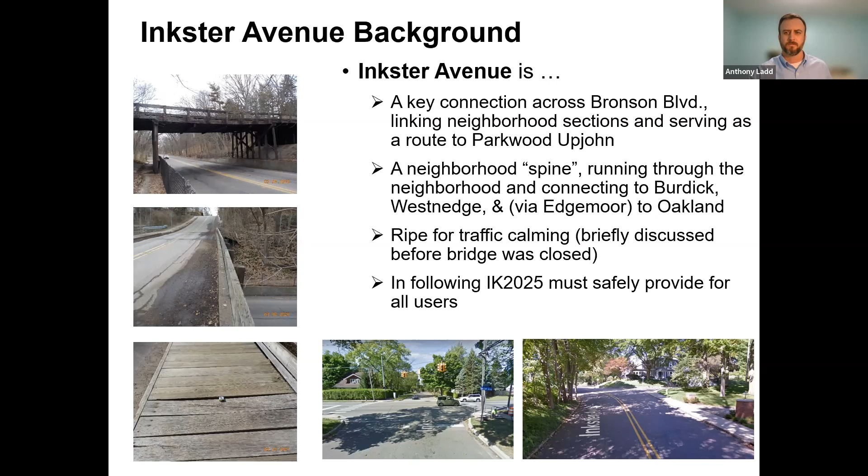The existing Inkster Bridge was built in 1990. It is an entirely timber span bridge with timber substructure, 42 feet long with a 6-foot wide sidewalk that was originally designed. It still exists, however, as many of you know, it is in rough condition.

In the spring of 2021, we made the decision, along with consultation with OHM, who handles a lot of our bridge inspections and our bridge program that we work with closely, to monitor conditions of all of our bridges, make sure our routine inspections are done, our specialty inspections are done on time and reported to MDOT accurately.

There were several concerns in spring of 2021 that prompted the city to close the bridge for vehicle traffic, mainly with loading concerns. And what we mean by that are trucks that do not necessarily adhere to the weight limits that are posted. The way that works is our consultant will come and do an inspection.

There is an engineer that gives a safe load rating for those vehicles, and we were not seeing complete compliance even after having discussions with heavy vehicle companies that you might normally see, such as recycling and trash collection companies, other heavy construction pieces of machinery, such as dump trucks and heavy loaded equipment that was not adhering to the posted weight limit.

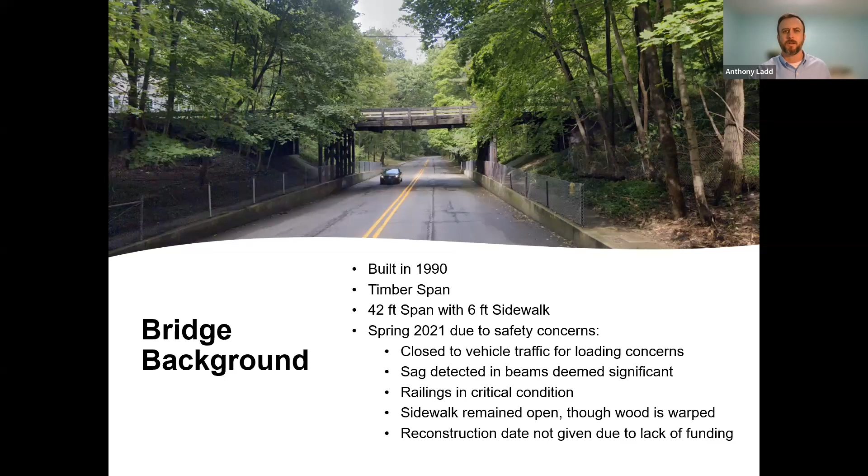These are more pictures of the existing bridge. You can see the deck condition started to deteriorate as well, and once that layer becomes permeable and water starts to infiltrate, with freeze thaw and other forces working on those timber members, that's what spurred the sag and the separation, the bending of the rail.

So those were the physical challenges that this bridge posed. And once that was decided to be closed, we are now facing funding challenges.

One of the things that we need to remember about this bridge in particular is that it is open to vehicular traffic and it is a designated Act 51 certified street. What that means is it's eligible for your gas tax dollars that come from the state. If the city decided to discontinue vehicular traffic on this bridge, we would not be eligible for that funding. And as it sits today, that's currently the funding mechanism for getting this bridge replaced and open back up for all members of the traveling public.

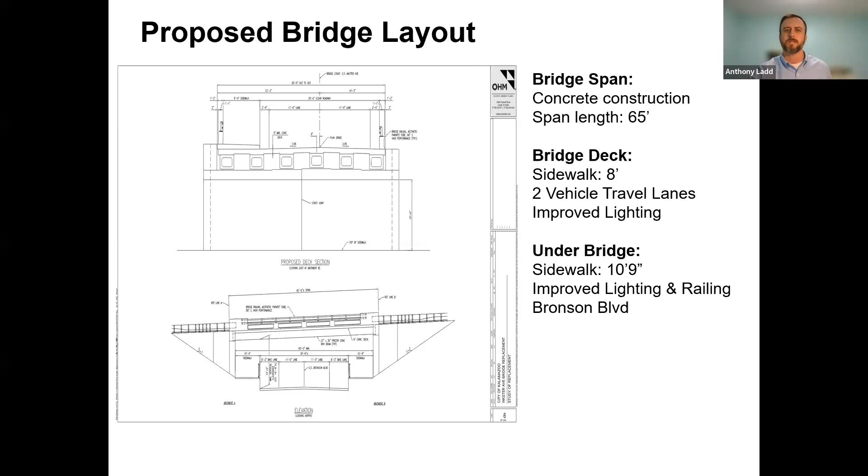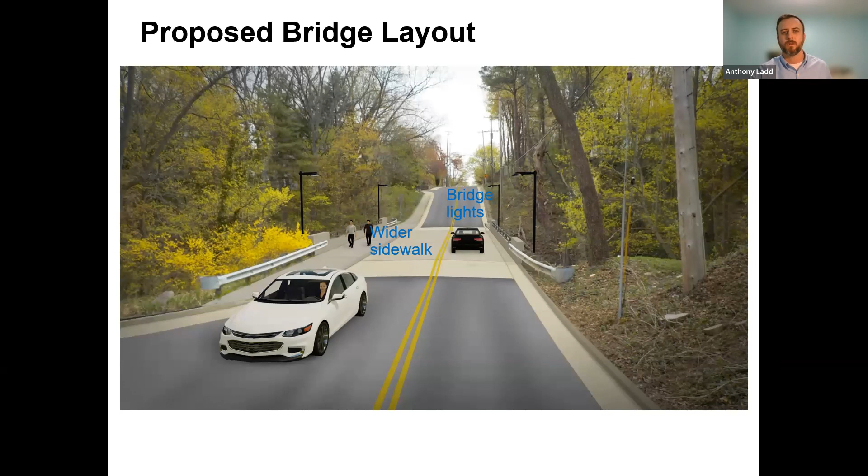The next slide would be a view from the deck if you were headed east on Bronson Boulevard or on Inkster. You can see it's very similar to the layout that was there before, with the addition of bridge lights, new railing, new guardrail, and a much wider sidewalk for pedestrians.

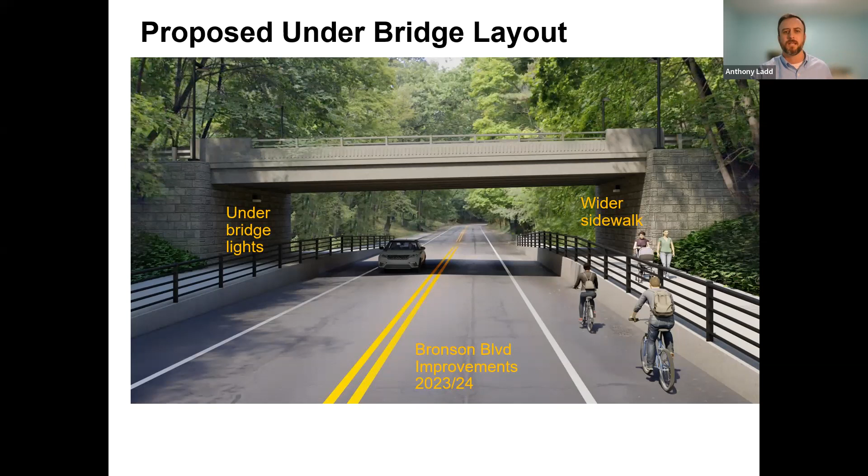This is a view from the side. Again, a couple of things I want to point out is the very wide sidewalk—it might be a little difficult in the rendering to picture, but it is significantly wider than what exists now. There's also the addition of railing that will replace the existing chain link, concrete decorative features on top of the bridge rail itself, different stamped features we'll talk about in a minute, and lights underneath the bridge as well.

This is pointing out the railings. These are the three items we are really looking for input from the community to weigh in on: we have several bridge wall designs you'll see on the sides of the bridge, which we call the bridge abutment, as well as railing along Bronson Boulevard and the pattern along the bridge railing on top.

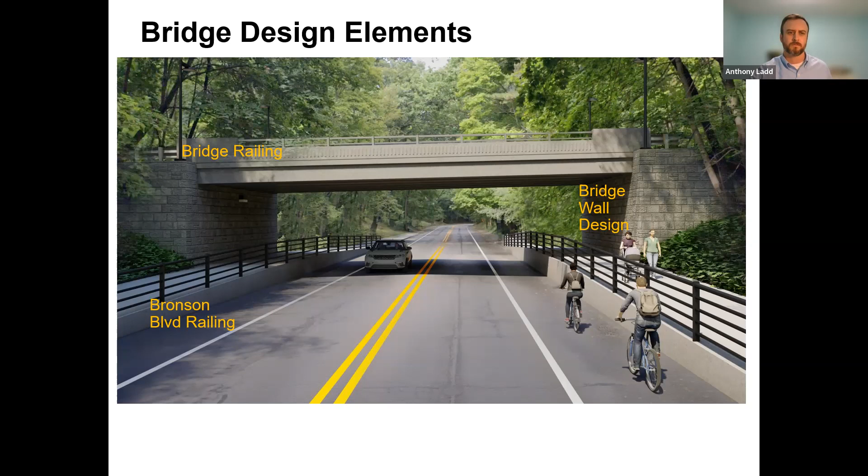So I'm just going to kind of speed through these. These will be some things that will be posted online and that we are looking to get opinion on.

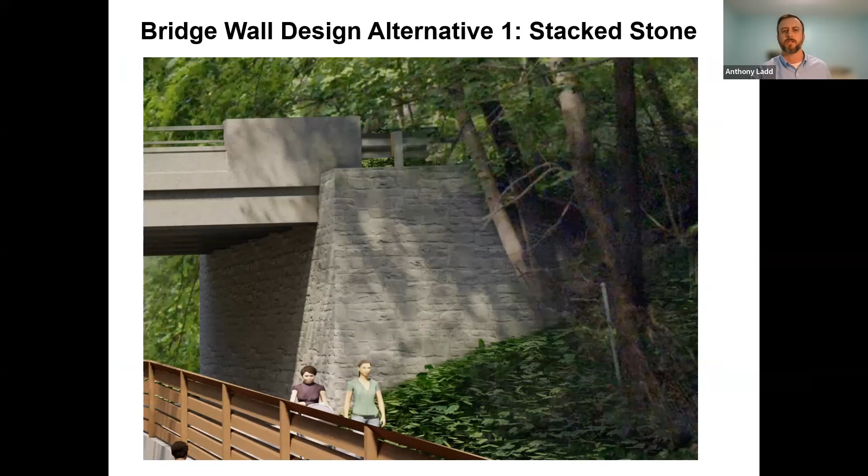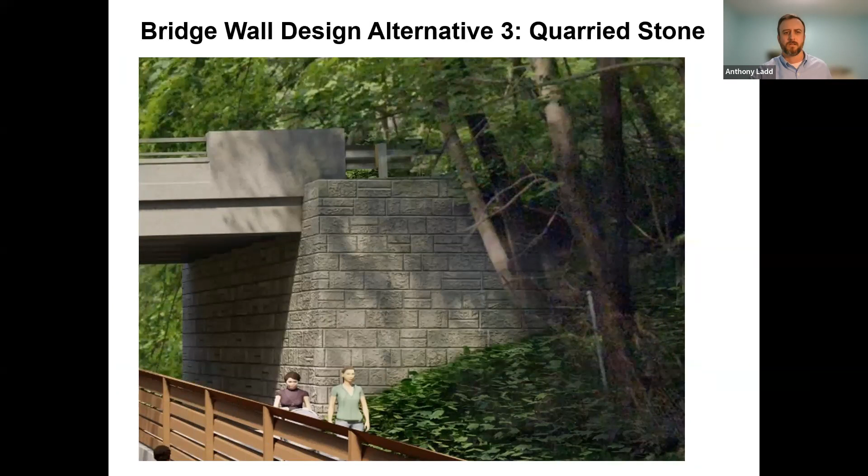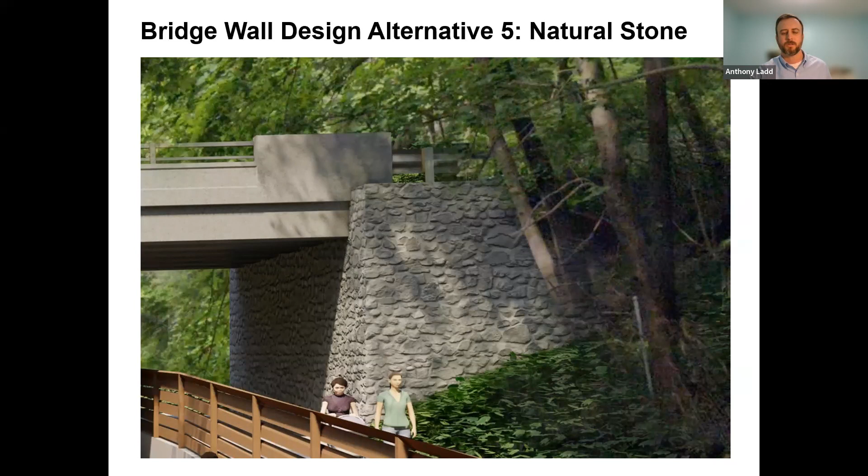These alternatives here are focused on the bridge abutments themselves. This is stacked stone, this is a block pattern, quarried stone, sandstone, and natural stone. Some of these stamped patterns resemble some of the retaining walls that can be seen along Bronson Boulevard too, so I'd like to point that out as that's being considered.

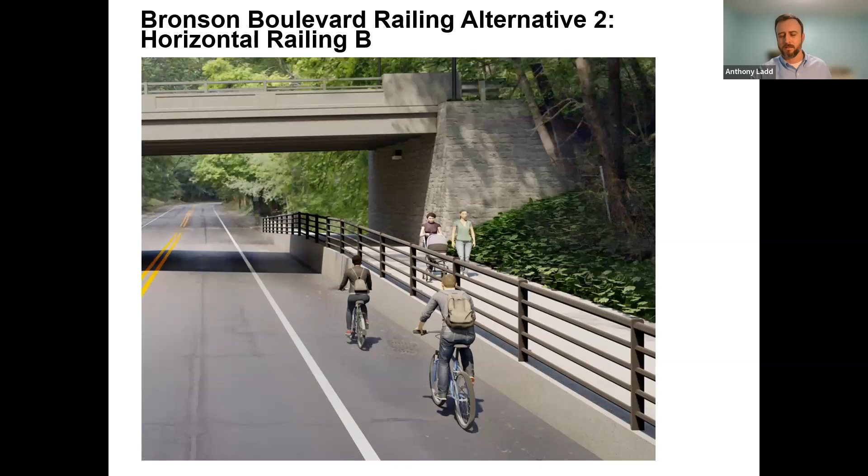The alternatives that we're looking for opinion on along Bronson Boulevard: this is one type of the horizontal railings, this is the second horizontal railing, and the third choice is a vertical picket that we have to choose from.

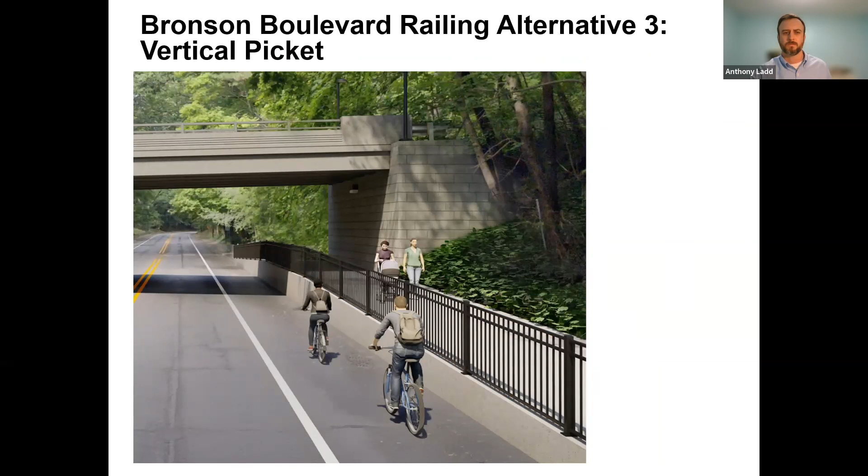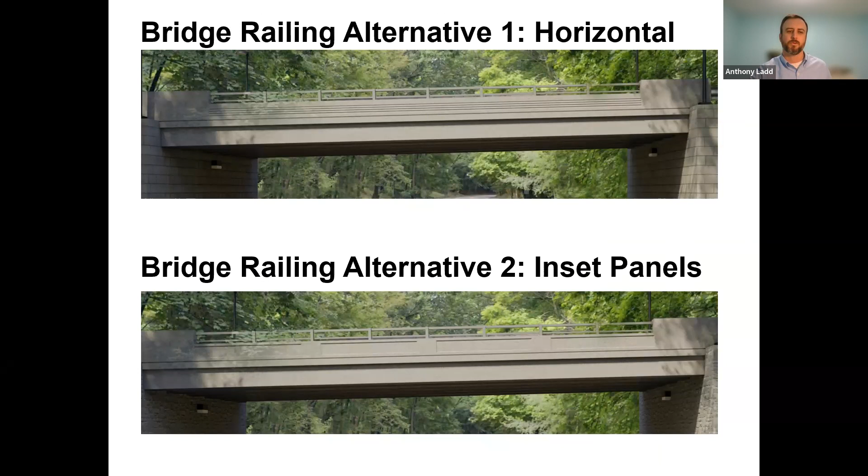And this is, again, probably a subtle difference, probably something that you'll have to look at online to really zoom in and see, to weigh in on. But these are decorative bridge railings to choose from.

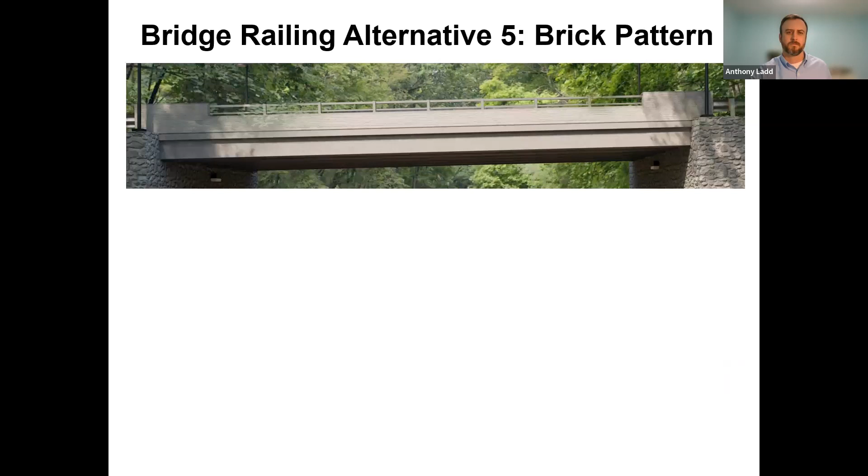Before we talk about next steps, I do want to speak more broadly again to how this Inkster Bridge affects the neighborhood, because we did hear a lot of concern about fast cars. We did hear a lot about being able to travel safely off of the road, where a lot of this neighborhood does not have existing sidewalk.

And that is something that we're working hard to address through a lot of our programs and relationships that we're building with neighborhoods through the neighborhood planning process. I think Christina might say a little more about that too. I don't want to overstep my area there, but these are programs that we're working on to address these issues, that we believe this bridge can be a part of, to help get drivers where they need to go, and get non-motorist users, whether they're school children or adults, or just anybody recreationally using non-motorized facilities. This is something we've been dedicated to for at least the last 18 months.

And then we've really ramped that up in the last year. We're equally excited to talk about our plans for those pilots and trying to understand specifically where the problems are in the neighborhood, and addressing those issues, not specifically to one bridge location, but looking to treat that issue holistically. Maybe I'll talk about a couple of the next steps and then turn it over to Christina.

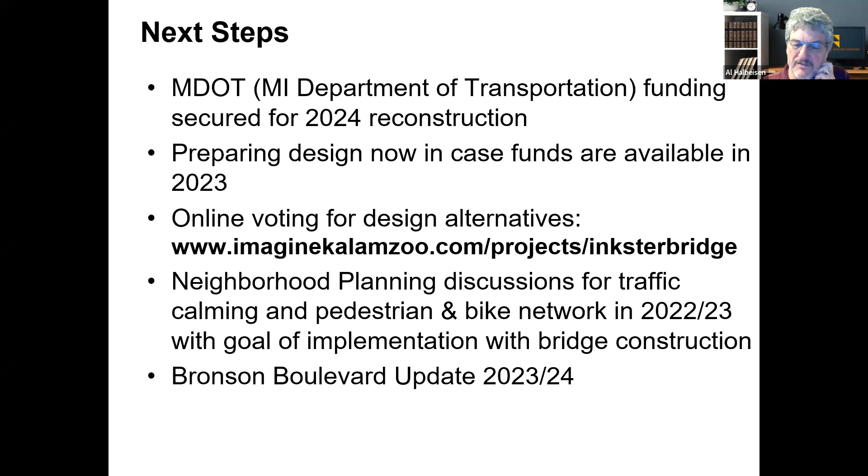Typically I deal a lot with structures over water that are more complicated as far as access. But something like this—backing up a bit, we've done some preliminary design on foundations, and we're not looking at a pile-supported structure, so that saves some time and money. I'd put it probably in the 3 to 4 month category for total construction.

It's a little more difficult if trying to keep Bronson open, and there may be periods where we'd want some restriction. We'd definitely want a temporary barrier to channel traffic through, but a lot of it could be done from above. Obviously when you do demolition and set beams, they'd want to be closing Bronson at those points, but those would be short-term closures.

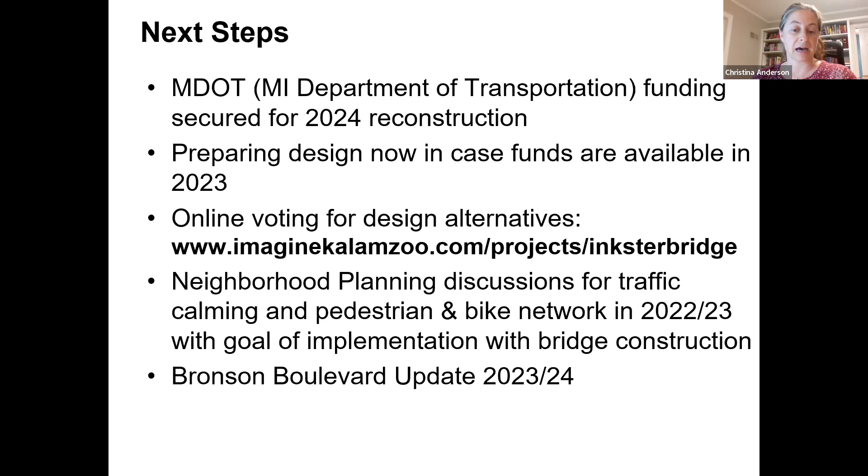We'll be having conversations with the Westnedge Hill neighborhood and the South Westnedge Hill neighborhood, south of Kilgore, when we get to those two places, to understand how we can calm traffic and think about Bronson Boulevard as the bike route it's signed to be. When Bronson turns into Crosstown, it actually becomes a striped bike lane, so more opportunities to discuss that in the future.